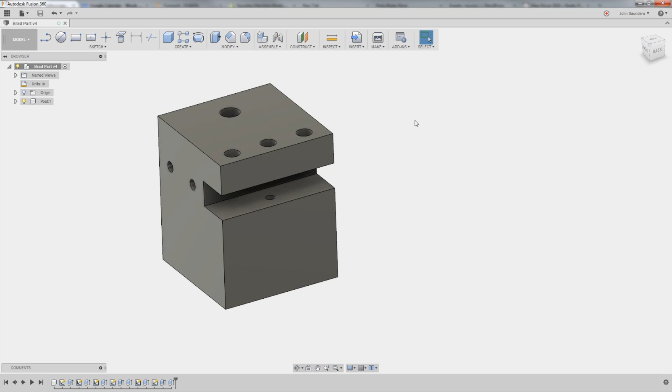So if you're an expert or guru, probably not the best video for you guys because we're going to take it pretty slow here. We're going to hop from model into CAM. And in the CAM, the idea is you're working left to right. So first thing we do is create a setup, then we create some toolpaths, and then we would post it out to our machine or to G-code.

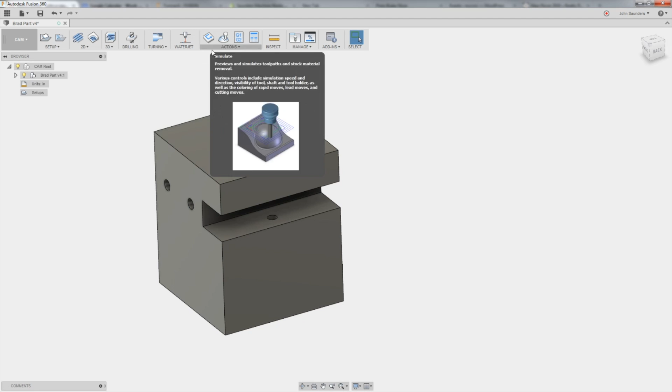So I'll click setup. And I'm going to have some weird defaults here, guys. Sorry about that. Stock, the second tab here, I like to say fixed size box. We're going to actually input the dimensions, and we're going to say, let's say it's 1.5 by 1.5 by 2 inches tall. Now notice your coordinate system.

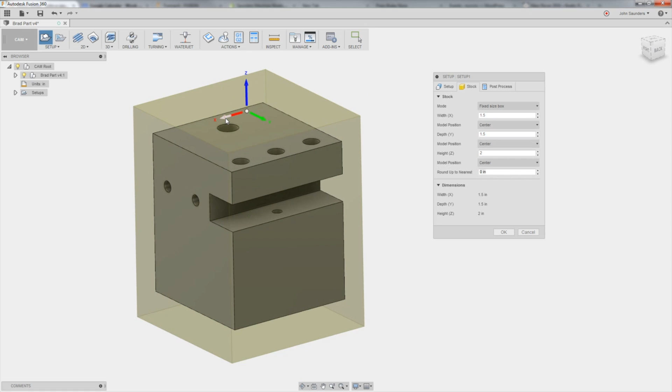Z is always pointed up or toward the sky. X should be pointed the other way right now. Z is up, Y is forward, so Y is backward right now. I'm going to click the tip of that X. See how I can highlight over that? Click once. That sets it correctly so that it's going to sit on the machine just like this, which is perfect.

Now the one question is, where do you want your part to be in your stock? So we're going to hold it with a little bit of material down here on the bottom. This is a little bit too much. Let's say we were saw cutting it. So we could say reduce this to maybe 1.75. So I'm typing right here. But then I don't want the model or the part to be centered in the stock.

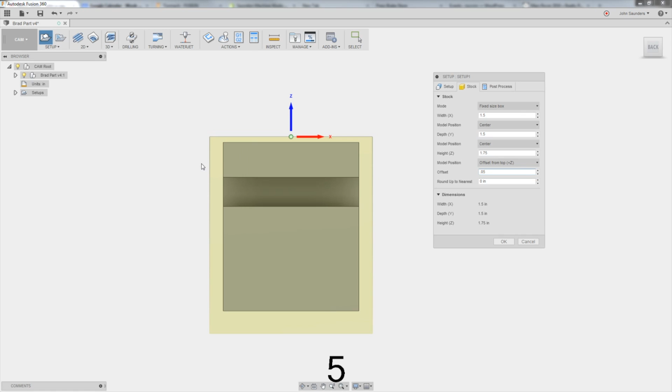So take a look. See, my stock height is 1.75, and it has the position as centered. If I change that to offset from top, it puts in a default value that happens to keep it in the same place. I'll just say 0.05, and that's going to push the model up inside the stock. So really all we're doing now is just a quick cleanup of that top face.

And this is perfect because that gives me more meat down here, which is exactly how I would make this part. I would use that extra meat here to hold the part in a set of hard jaws with parallels. So our setup looks good, and the most important thing, frankly, is understanding where this point is right here.

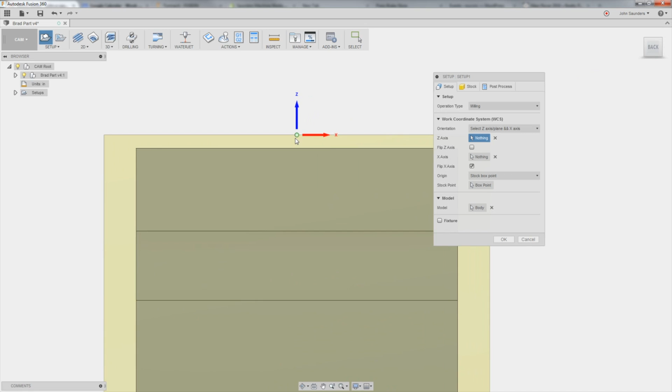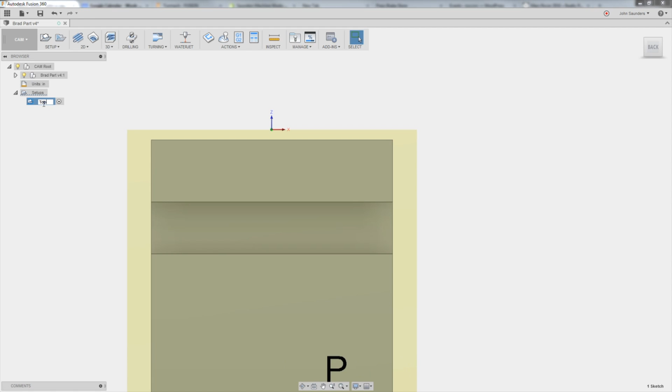Because when we are in the machine, we're going to use the top of the stock as our Z0. So we'll bring down a height gauge or a probe or a Haimer and find the top of our stock and set that as Z0 in our controller like PathPilot. So I'll click OK, and that's now created our setup 1, which I'll call the top of block.

So after we've got a setup, let's add some toolpaths. I'm going to go to 2D, the drop down menu here. Be careful if you're new to Fusion. Clicking the icons is sometimes not what you want, but clicking the drop down menu here will open up things like face. So facing is going to be an operation, and by the way, these pop-up windows are great. Produces quick part facing to prepare raw stock for machining.

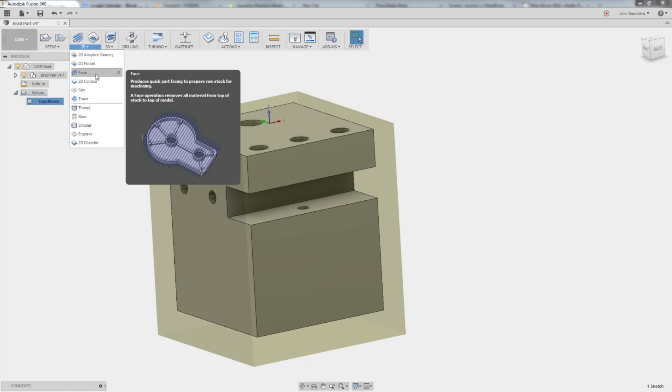So this is where you would use something like a face mill or a fly cutter. For me, it's tool 47. That's our Tormach Superfly. So I'm going to first select my tool. And if you don't have the tool that you want, you might click right here and just check all. That's going to basically wipe out the filters that are reducing the tools you have available to select from. So for me, it's tool 47.

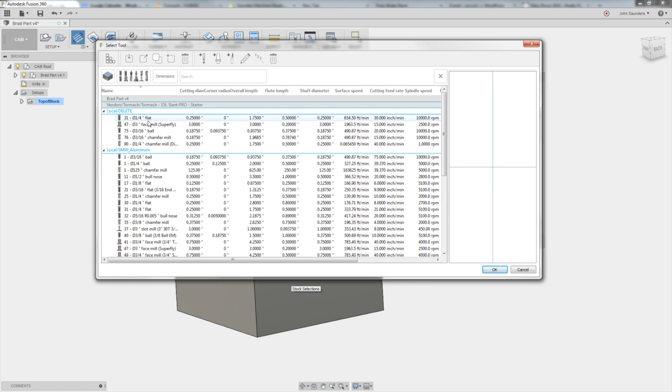You do have to set up a tool library. It's a video that we've been looking forward to doing, and we'll put a card to that here when we have that published. But feel free to poke around on the forums or some of our other videos in the meantime if you're looking for help on creating a tool. Click OK.

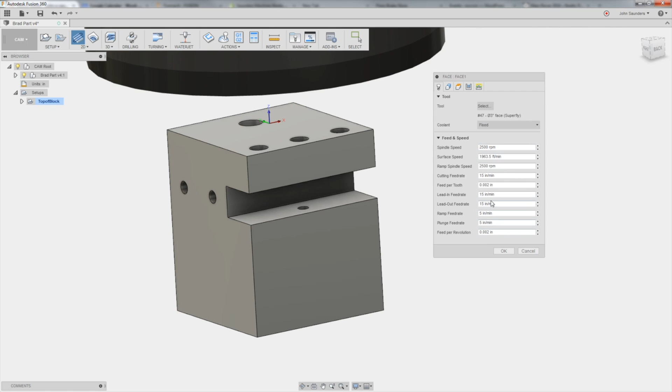So we've now picked the tool, and in that tool library we already had our speeds and feeds that we had put in earlier. So we're pretty much done with this first tab here. Geometry we don't have to worry about, and in fact, none of the rest of these for facing do we really ever have to worry about, which is pretty awesome. So click OK and take a look.

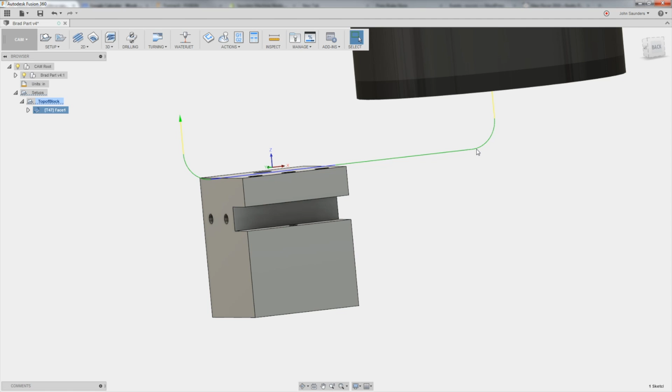The colors do mean something here. So the yellow is a rapid move. So the tool's rapiding down, and then it's doing a green move, which is a linking move. So that's where the tool's now moving at a much slower feed rate than a rapid, but it might still be faster than your cutting feed rate. And as soon as it gets close to the part, it switches to blue, and that's your cutting, and then it goes back to a linking move out and then rapids up.

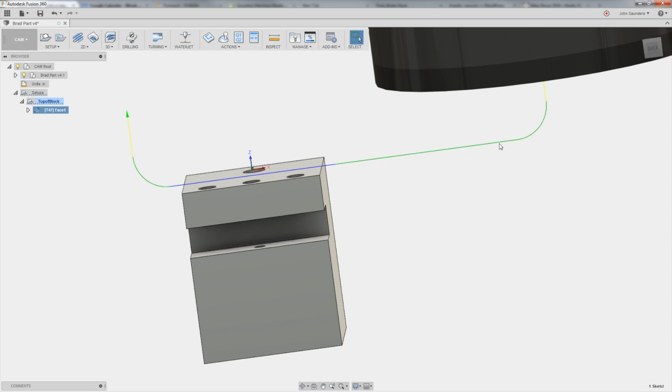If you're wondering why these are curved, it's because CNC machines do better when you don't ask them to take hard rights or hard turns. Just like you don't turn your car 90 degrees, you actually turn your car around a radius, even when you turn onto a street. So by having the machine swoop in like this, it prevents the machine from going down to a complete hard stop and then a hard turn. So we've got that decked off.

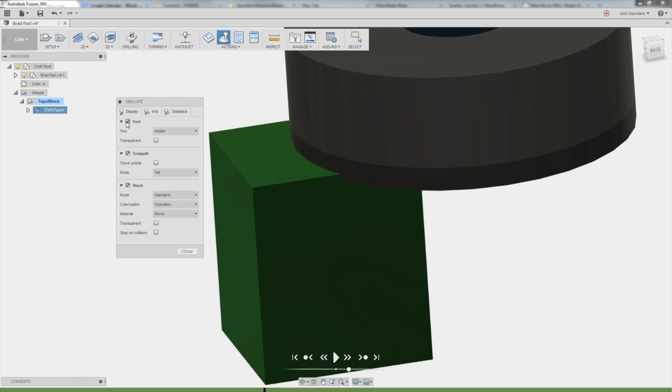Simulation is your friend. This guy right up here, click it. There's two things that I like to change. They're already actually shown right here, but mode of tail and then turning stock on. If you hit play, this, by the way, down here adjusts your speed. And let's hit pause and let's actually turn off the tool for a second right here. And you can see it's showing the radius of that cutter. You're subject to the graphical limitations of simulation going across this face and exposing. You can kind of see the CAD model holes right there. So let's add some drills.

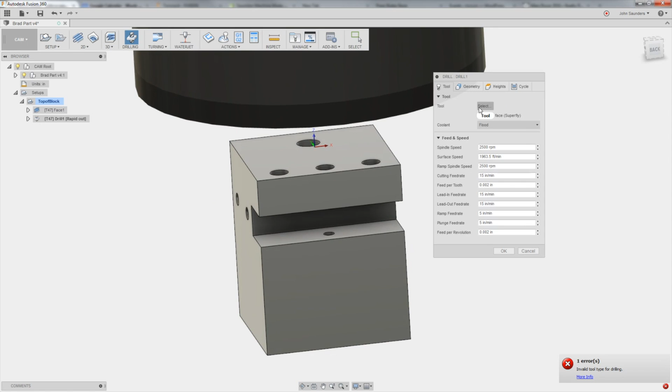Drilling. I would probably spot these holes first. So I've got a spot drill set up here as a tool. Actually, you know what? So the filter didn't come up. That's okay. I'll click right here and I'll add spot drill. That's something they should fix though. So 16 is my spot drill. Click OK. And under geometry, it's your second tab here.

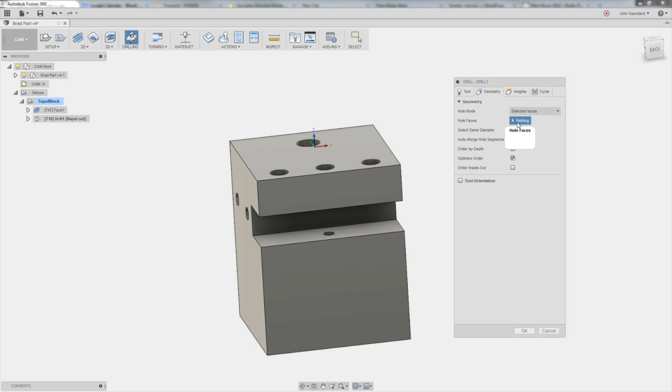Hole faces. See how that's blue? That means it's the active thing. It's ready for me to pick the hole faces. So there are 4 holes here that I can spot. 1, 2, 3, 4. Now pay attention to what happened. It already gave us a live preview of the toolpath. And see how the green is going all the way down into the hole and through the hole? That's not okay. So all I'm doing here is spotting the hole.

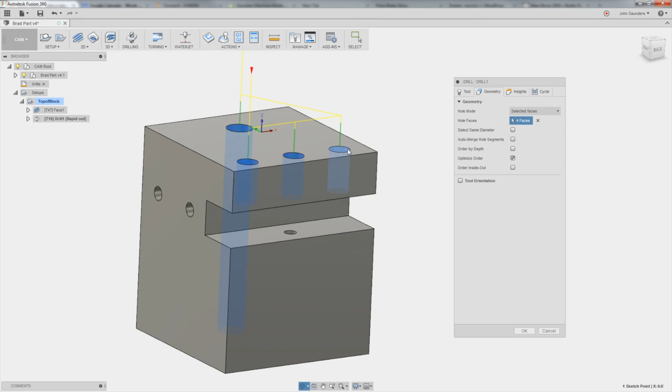So on my third tab, which is the heights tab, don't get overwhelmed. There's a lot of noise here. Clearance height, retract height, feed height. Ignore all of that. The two that I care about are the top height and the bottom height. So the top height is my hole top. What does that mean? That means it's looking at the top of this hole and it's saying that's where your hole actually starts. That's perfectly acceptable.

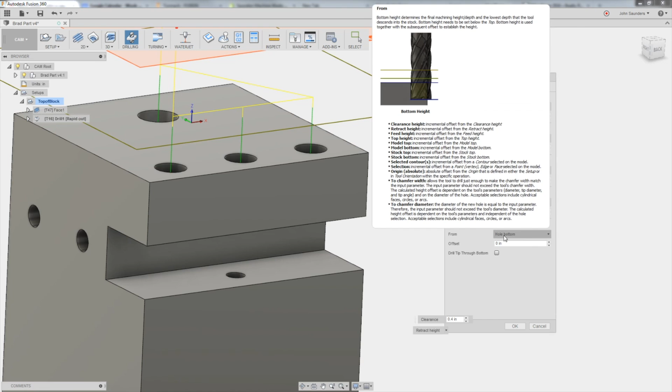What's your bottom height? Here's where this is a little bit weird. The bottom height for a spot, I'm going to set as the hole top. And right now that would mean your hole is 0 inches deep. Well, that's not okay. I actually do want the tool to go in a little bit. So I'm going to say from the hole top, but in this offset value, I'm going to put negative 0.05. That's going to push that tool 50 thousandths into the hole from the top of the hole. If that doesn't make sense, rewind this a minute and watch that again.

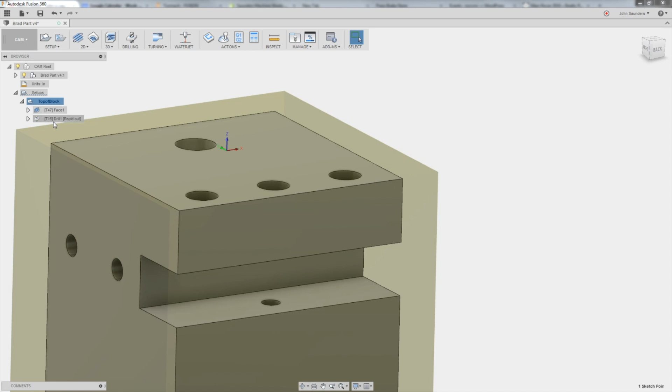I'll click OK. And I am a big fan of simulation. So I'm going to go back to the top of the block, the setup here, which allows it to simulate all of these operations. Simulate. And I'm actually just going to fast forward or go to the end of the toolpath right here because I don't need to watch it. I just want to see what it looks like. Sure enough, I get 4 little dimples there.

Perfect. I don't even know what this hole diameter is. Let's see if we can get a reading on that. So it's a .201 hole. So let's do this hole. Drilling.

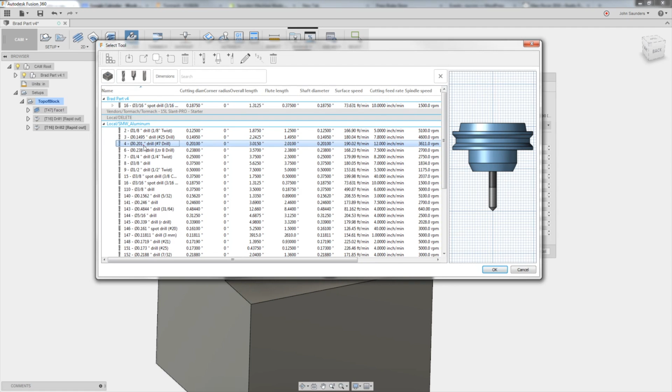I think I've got this set up as a number 7 drill. Perfect, I got lucky, I already have it. Click OK. Second tab is geometry. So what is the hole I want to work on? Well, it's this hole right here. But this time we're not pecking or spotting. We want to drill this whole thing, and this is actually a pretty long hole.

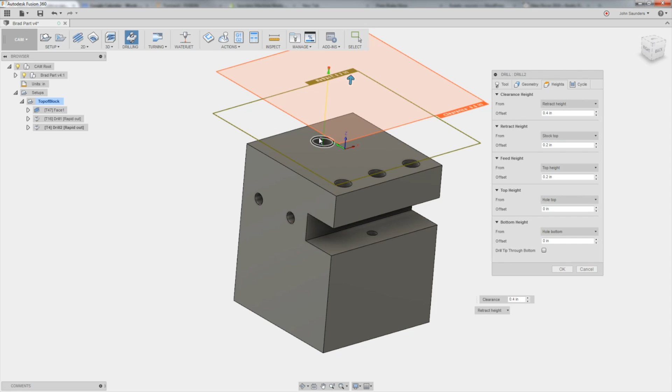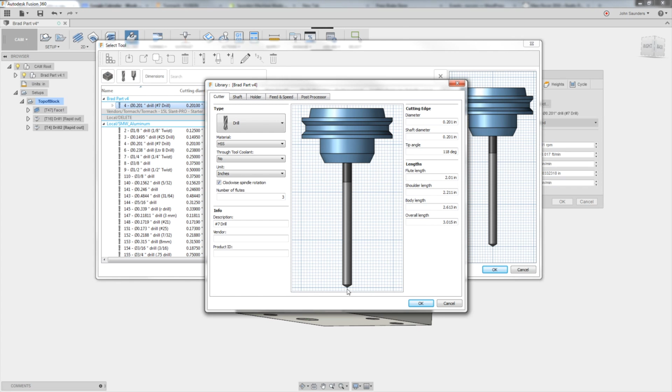So under heights, it's got hole bottom. Does that make sense? Well, there's the top of my hole, and that hole is a straight hole all the way through. So a hole bottom actually does make sense, except remember, if we look at a drill tip, we'll edit this tool and show you, a drill tip has a point and then an angle. When we set that tool up, we measured the very tip of that as the height of the tool. So we need to actually poke this drill through further than what you see right here in order for it to actually clear the full hole.

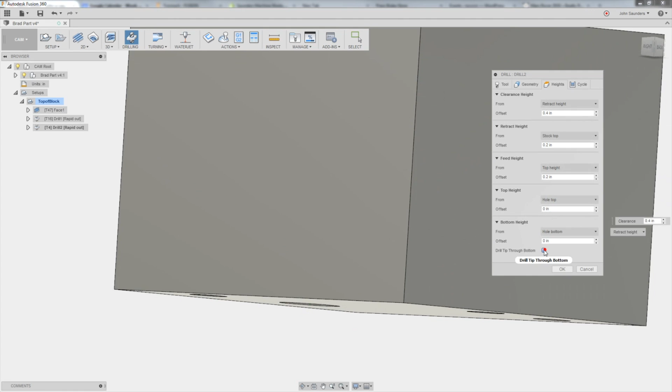They luckily have thought of this already, and under heights, there's a checkbox called drill tip through bottom. You just check it. It automatically, see what it did there? Look at this green line when I uncheck it. Checking it, it adds it. I like to add a little bit extra, so I'll say 0.03 just to give us a little bit more push through.

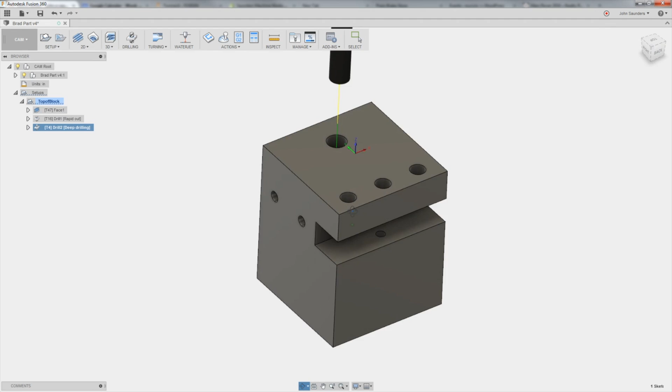Now, unless you've got something crazy like a machine with through spindle coolant and you're using specialized drills and tooling, you're going to want to peck this. So that's the last thing here under cycle. I would change it from a regular drill that's going to push all the way through in one pass to something like a deep drill full retract. This is going to peck the drill every 50 thousandths. Takes a little bit longer, but a much safer way to drill, especially with a regular twist drill. If you do a lot of deep holes like this, look into parabolic drills. They're great for better chip evacuation.

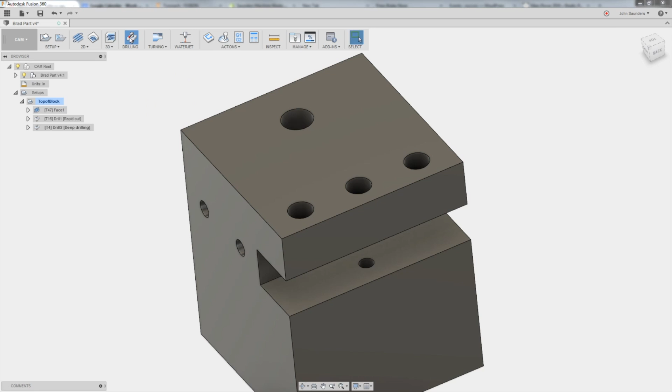And I would do the same for these front 3 holes. Let's see what they are. 0.159. So, okay, we'll set up a tool because I don't have that drill modeled. So I will go to drilling. I will select my tool. Here we are in this Brad part file. I click there once to let me know I'm working in this Brad part of the tool library. You can see this plus icon right here. I'll click it, and that pops up my options.

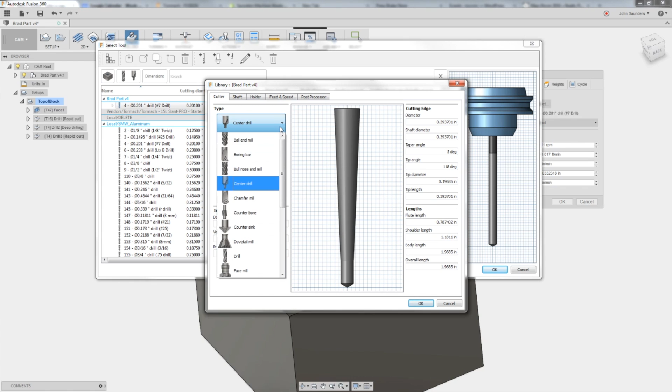What's the type? It's not a center drill, it'll be a regular drill. What's the diameter? That's the top right, 0.159. And you would populate the length of it as well. I tend not to worry about some of this stuff here on the left. I do care about speeds and feeds. I don't know it off the top of my head, but I'll say 2500. And on a plunge rate, let's just say we go 10 thou per rev. That's a little fast. We'll say 5 thou per rev. Click OK.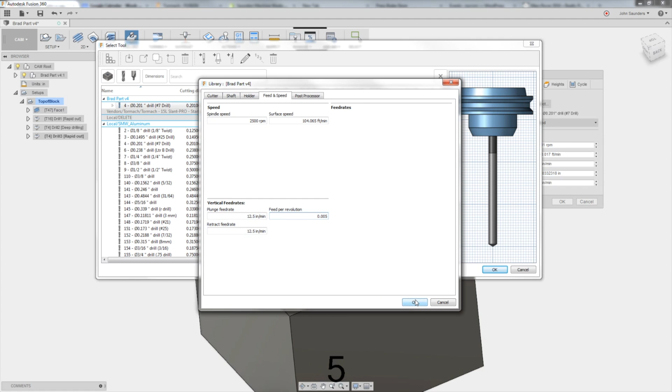And so now I've added that. Let me show you one more thing. Right click, edit tool, post processor. This is where you would set your tool number. So let's say that that's tool number 22. Click OK. And now I can pick tool drill 22.

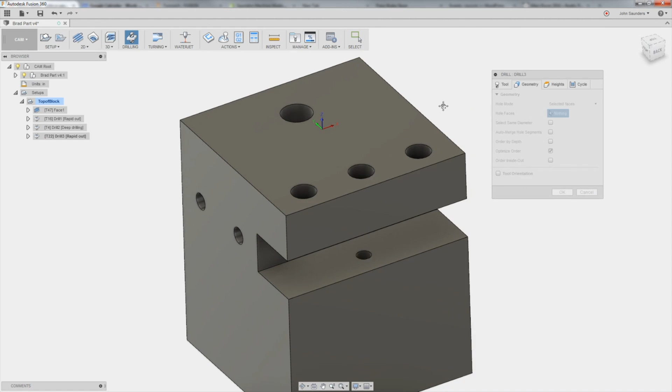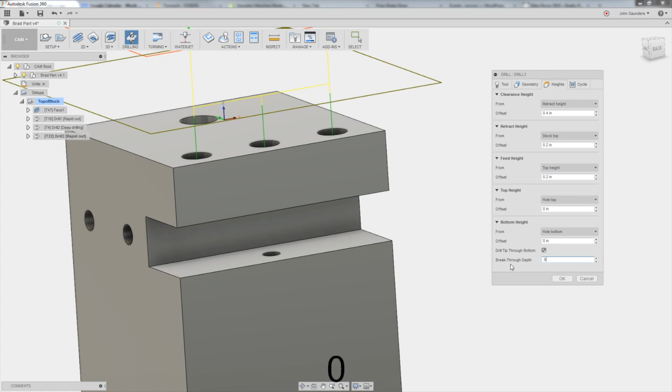And under geometry, let's say you've got a whole bunch of holes that are the same size. I'll pick this first guy, and then check the select same diameter box, and it'll go through and automatically pick the other few. And the same thing, I want to poke these through a little bit more. We haven't actually machined this slot yet, but nevertheless, I want that drilled hole to be a through bore there when we are done. So I will just check drill tip through bottom with 0.03, and we're good to go.

Save my file. So that's a very simple, let's do a simulation, a very simple face spot drill operation, where you can see along the simulation, it's going through here.

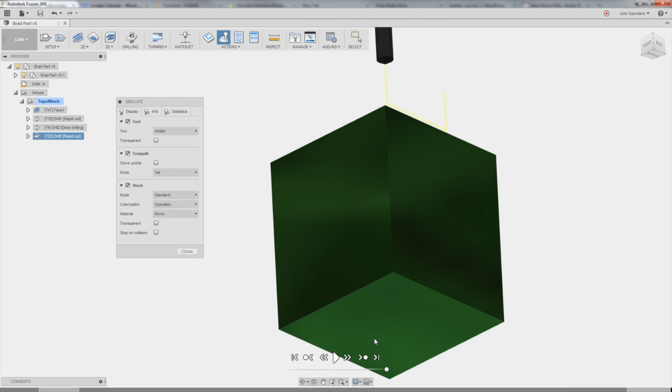It should poke through. Oh, it didn't poke through in the bottom, remember, because our model stops right now at the top of that play button. Yes, I actually do this in real life when I'm testing things, but our stock goes a bit further down because of the parallels that it's resting on, and that's fine.

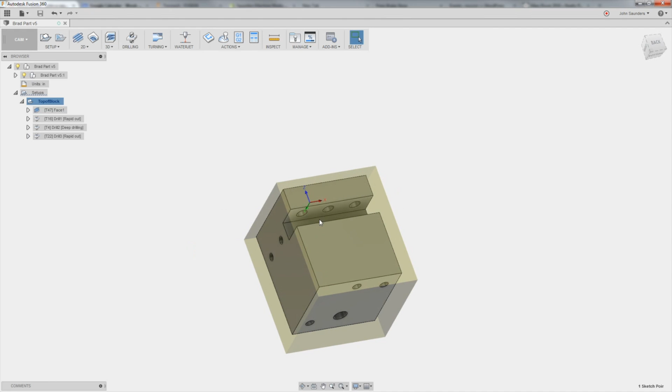I'll quickly show you one more operation, which would be, let's just do this slot. So that would be a new setup because we're actually going to take this part out of our vise. It's being held sort of like this right now if we're looking down from the spindle of the machine, and we're going to lay it on its back to machine that slot.

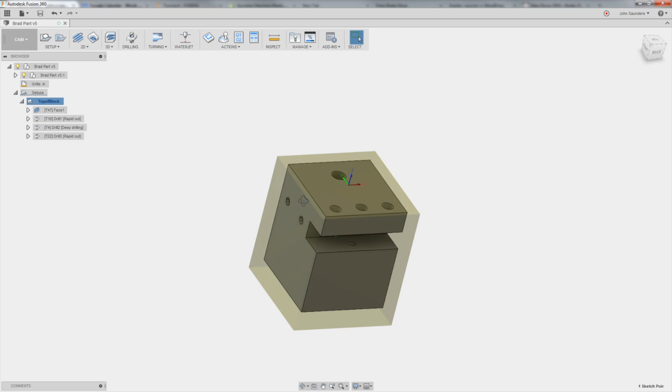Oh, you know what? Let's do one more thing. I'm sorry. While we're here, it's a little bit of a tall part to cut this with the side of an end mill, but for the sake of this example, let's show it. We'll do 2D adaptive clearing, and we'd have to pick a larger tool that would have enough strength. And this is, again, not really how I would normally do a part like this. I would probably normally machine all the sides of it, but we'll just take a look here.

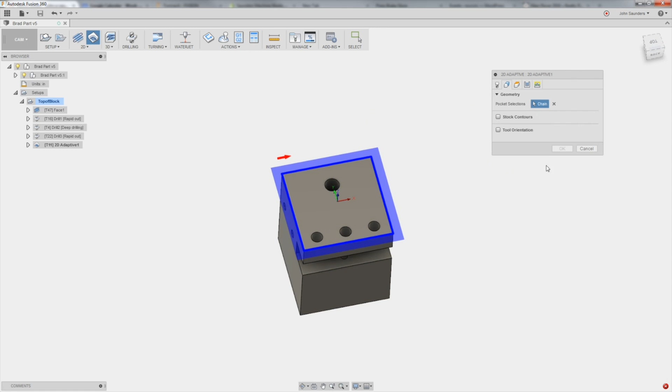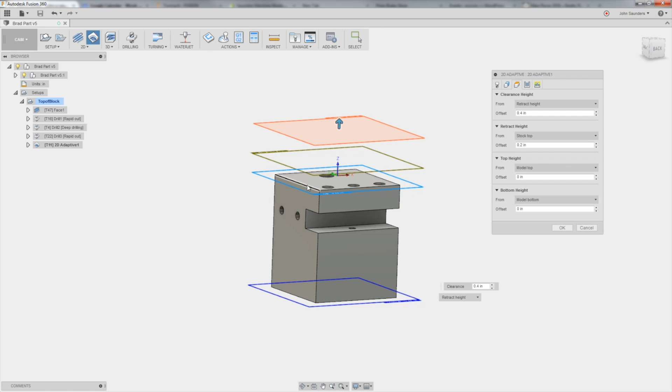We would click this area here for the chain, and under heights, these are really important. What's the top height? I have mine set as selection. Yours probably defaults to model top, and that's okay. And then the bottom height, I'll pick model bottom. So again, just so we're clear, that says that the eligible area for this 2D adaptive to machine is from the top of the model, which is that area right there, to the bottom of the model. Click OK. Let's see what we get.

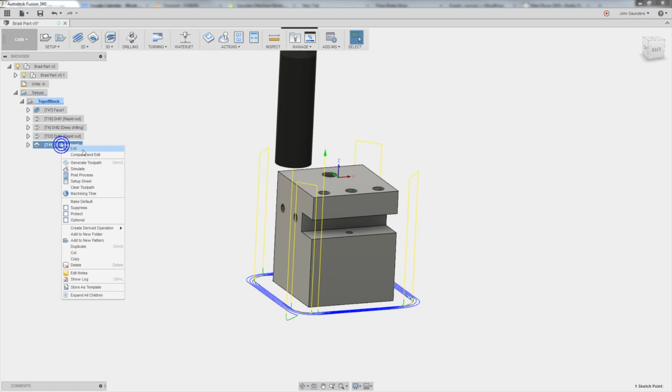Awesome. So it's going to come around. We're not going to get into what 2D adaptive toolpaths are in detail, but basically they're a way for it to understand and maintain a good chip load. We might want to do that in a couple of depths of cut. So I'll right click, edit, and under passes, fourth tab, I'll say multiple depths. Let's say we don't want to go down more than 0.3. And we'll click OK.

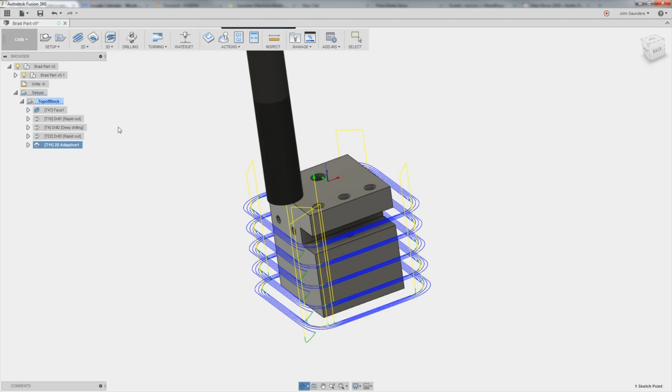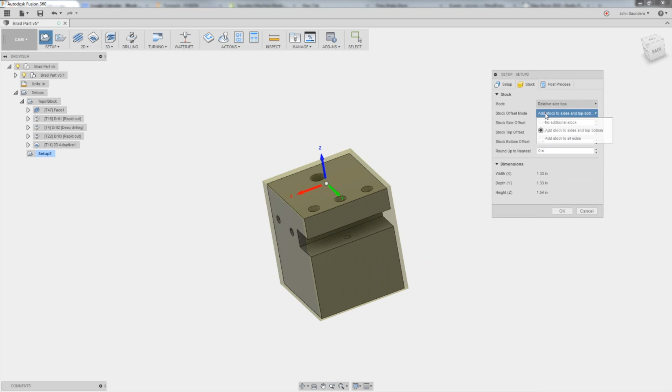One thing to note, adaptive toolpaths are not finish passes. They're roughing strategies only. So we'll show you how you do that correctly with this slot right here. I'll do new setup, but this time we've got to move our work coordinate system. I also want to fix my stock, because let's assume by this point we've got our block sized correctly. So under stock, I would change from relative size cylinder to relative size box. And under stock offset, I would say no additional stock. So basically we have a piece of stock that's exactly the size of our part.

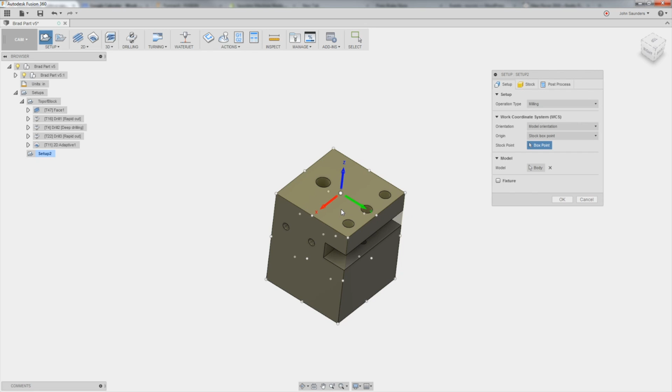I would then go back to the setup tab, the first one, and orientation. So right now, it's inheriting the model orientation from the CAD when we made this part, which was that this face here was pointing toward the sky, or perpendicular to Z. Well, we're going to lay the part down like this in the machine now, so I need to change that orientation. I'll click on model orientation and pick this first option, which is going to let me select my Z-axis. When I do that, these menu options here change.

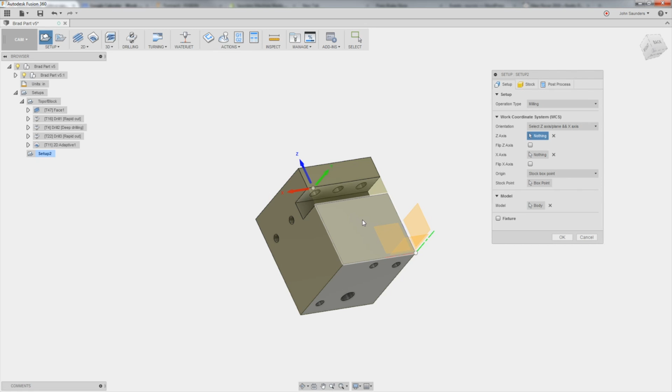So Z-axis, what is my Z-axis? I'm going to pick this face right here and watch the blue arrow. See how it now pops to pointing up? It's exactly what I want. But my X-axis is flipped. So I'm going to click this line right here, or here would work as well, and see how that puts my work coordinate system triad correctly, showing that Y is forward and X is to the right. Awesome. One last thing though, where do you want that location point to be?

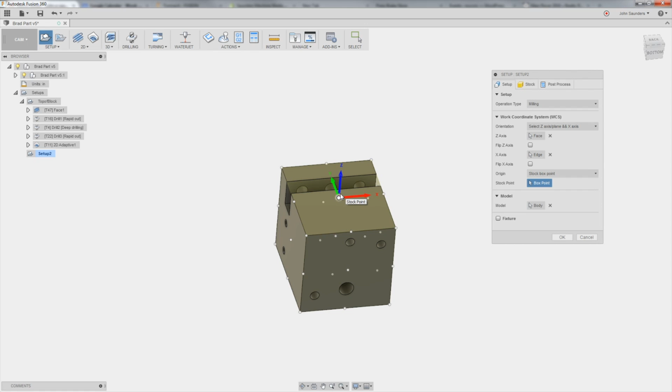Since we have this block machined to size, I would probably pick the top left corner, because that's where I've got my hard jaw and where I would be able to edge find. So I'm going to change from a stock box point to a model box point. And in this case, there is no difference between those two because my stock is the same size as my model. I still want to do this correctly, because if I change my stock later, I want to know I was still picking off a model point, which is that top left point right there.

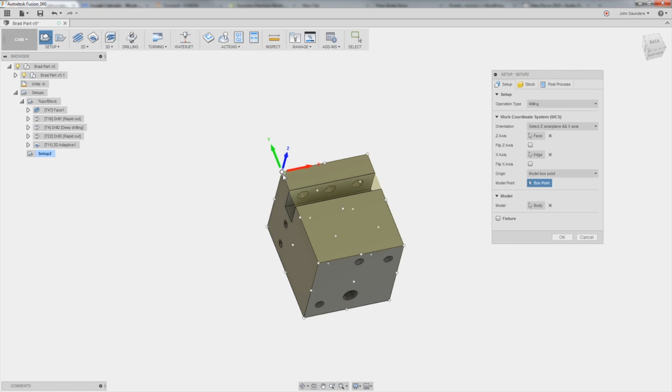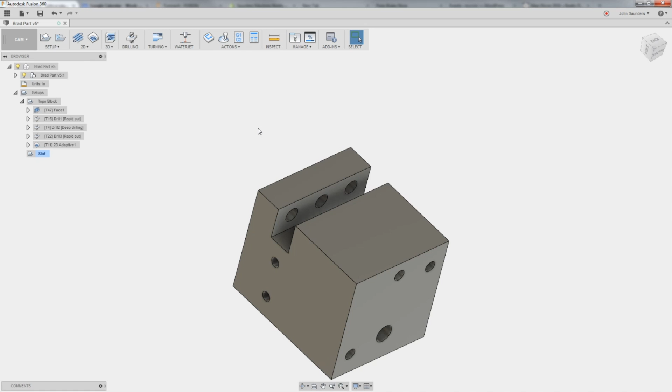Click OK, and we've got our setup 2, and I'm going to call this the slot. So how wide is that slot? 0.26. So even though it's 0.26, I'm still not going to cut it with a 1/4 inch cutter, because you never want to slot, and you could do it with a 1/4 inch cutter, but that's a little bit tight. We'll use a 3/16. So I'm going to do 2D adaptive clearing. Pick a 3/16 tool. Tool 21 for me.

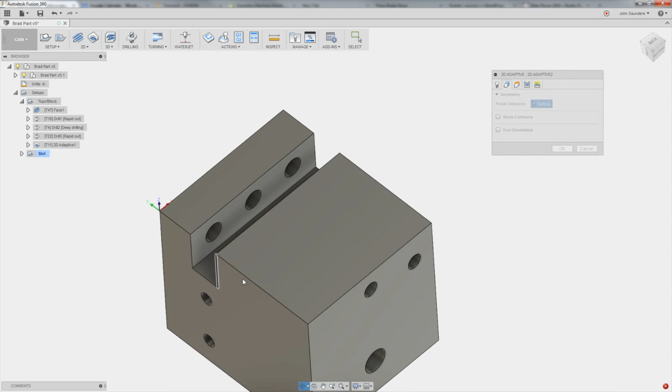Click OK. Second tab, geometry. So pay attention with 2D adaptive to what you pick. I could pick either the face, like this, or I could pick the lines. I generally prefer to pick the lines. So let's click this guy, and look what happens. It basically put a blue square all the way around here, which is okay, but I need to limit it. So watch, if I click this other line, it keeps me within that channel.

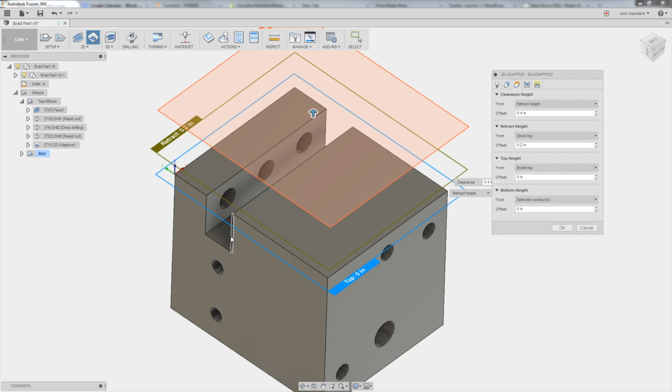What are my heights? Top height, I need to be model top, and again, that should be your default already on your computer. And the bottom height is selected contour. In this case, that's perfect, because that's the contour that I picked back here in the geometry tab. Let's just click OK. I don't like getting too far ahead of myself, because you want to make sure you get a toolpath before you worry about doing too much tweaking.

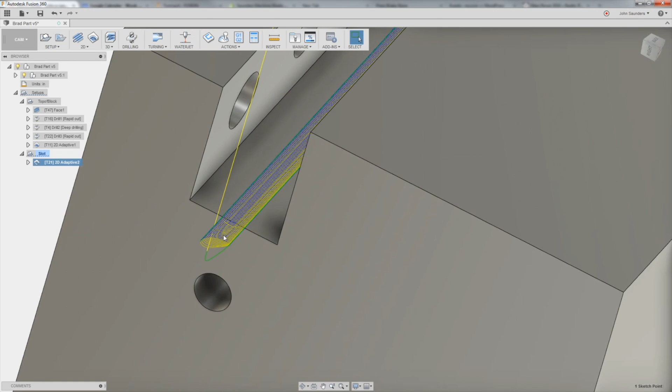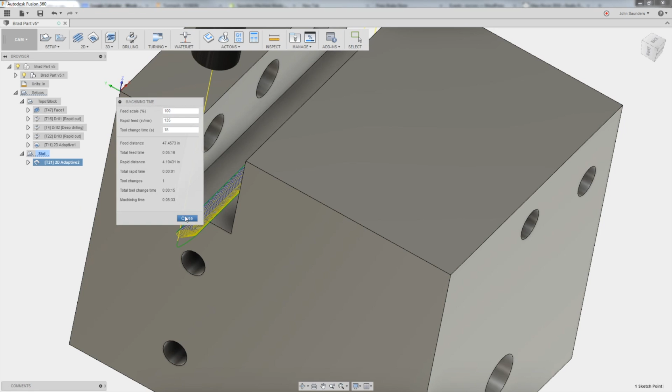So sure enough, that's an awesome adaptive toolpath, because it's going to avoid overloading the cutter. So it's going to take a bunch of swirly cuts. And it looks like it's long. We can take a look and see. Oops. Don't click clear toolpath like I just did. Machining time. You see that? If I right click on the operation, it's actually going to tell me how long that operation is going to take. 5 minutes and 33 seconds. That is way too long. So let's see what we can do about that.

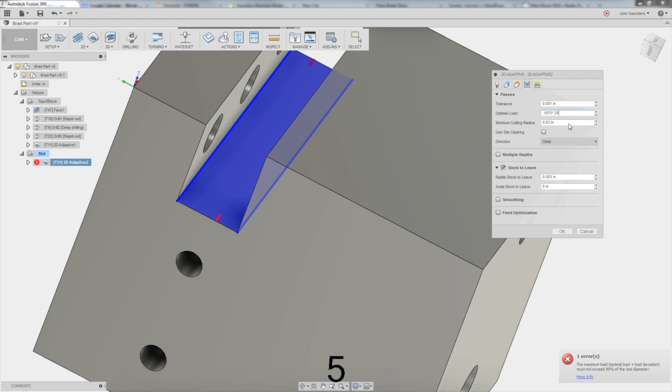Right click, edit. Well, first of all, my speed's way too low here. We should be cutting at 1,000th per tooth. So that's going to almost double my speed. And then under optimal load, that's basically your width of cut. So what am I willing to do with a 3/16 inch end mill? It's 0.1875. I'd go a quarter of it. So rather than do math in your head, just type 0.1875 times 0.25. And we're going to leave radial stock. I'll come back to that, though. I bet you this will be a lot faster. Right click. Machine time, 1 minute 46. Awesome.

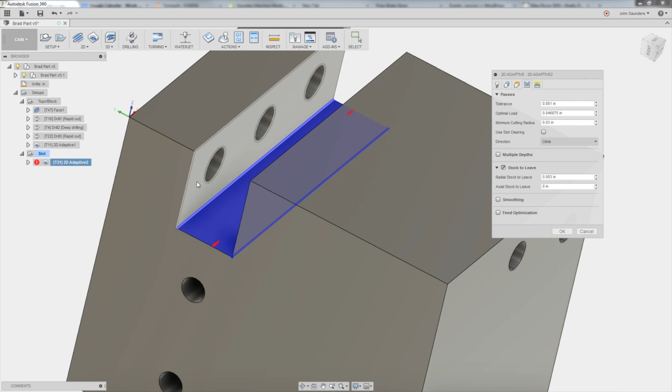So because adaptive is not a finishing strategy, we have some radial stock to leave. What that means is it's not going to touch this face, nor is it going to touch that face. So what we need to do is come back with a contour to clean up those faces. 2D, contour, 1, 2, we should be done. If you take a look, it pulled in the last tool that we used, perfect. Our heights are already perfect. That's an error on my computer, don't worry about that offset there. Click OK.

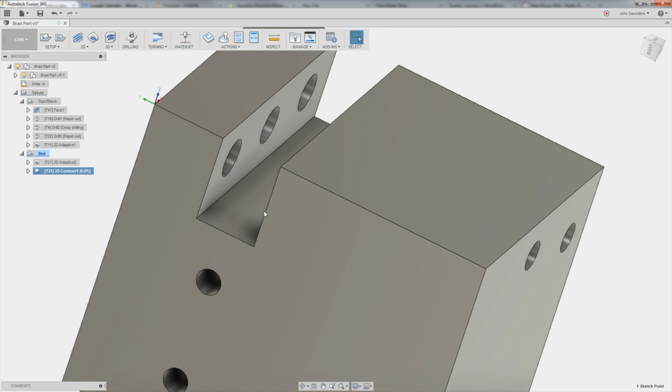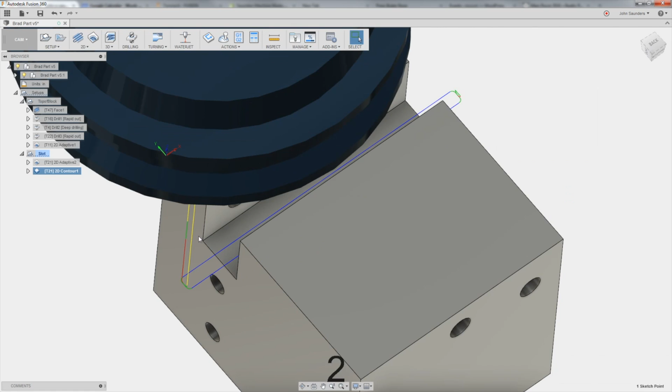Awesome. If you wanted to run those a little bit further past, which I normally would, right click, edit. Under geometry, the second tab, tangential extension distance. That's a mouthful. I have no idea why it needs to be that complicated of a term, but type in 0.2. It's going to push that toolpath in both directions past for good measure. Awesome.